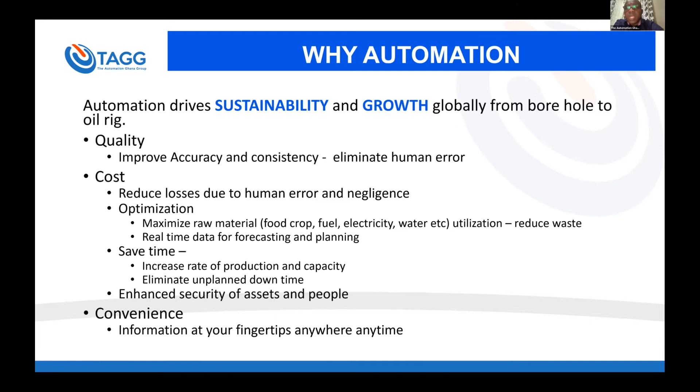An automation engineer should be able to help. Now you save time, increase productivity, and eliminate unplanned downtime. This is because these days, routine maintenance and scheduled maintenance is outdated. We do predictive maintenance, and predictive maintenance, obviously, you need some level of artificial intelligence. I'll talk a bit about it later on. And then enhance security. You can use automation to enhance your security of assets and people. These days, you can track anything, including human beings. And then convenience, of course.

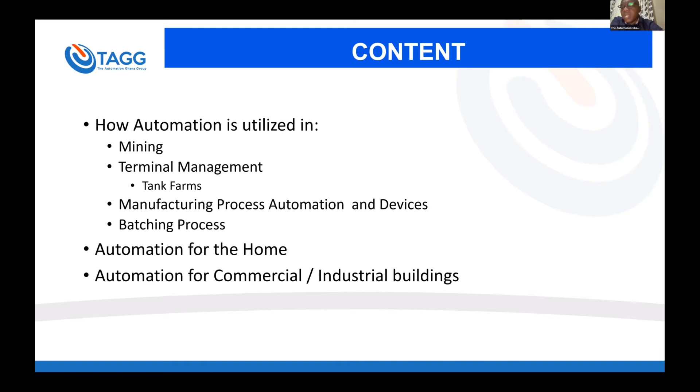So this evening, we'll be talking about how automation is utilized in the mine. I'll just take a bit of the mining process and talk about it. I'll talk about terminal management, particularly for fuel tank farms. I'll talk about the manufacturing process in general, and I'll zoom in into soap manufacturing, how automation is employed in the soap manufacturing process. Then I'll mention something on batching processes as well. Then we would go into smart homes and then commercial buildings, or buildings in general, how you can employ automation in such properties.

Now, this process could be driven by a conveyor belt and just motors, and it goes into the drum. But what if the drum fills up faster than it being emptied? There will be a backflow, and so you know that the ore would pile up on the conveyor. The conveyor would have to overcome the extra load, and then the motors would stall and stop and trip, and production stops. This is where automation comes in.

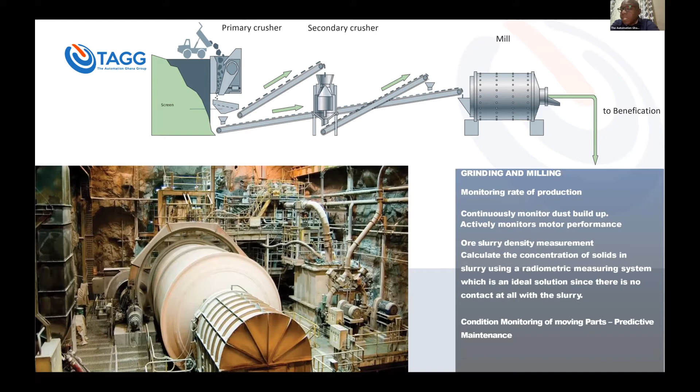As a minimum, there should be what we call the overflow prevention system, because as soon as you have fuel spillage, you have a disaster. So as a minimum, if you would not automate at all, there should be the overflow prevention system.

And how does this work? You install sensors on top of the tank, and they detect the presence of liquid and signal the pump that is filling it to stop, raise a siren, and send messages out there for everybody to be alert that this is what's happening.

Usually we have 3 levels: high level, high high level, and a dead level — this is the level you must never get to. For most installations, you find that the sensor at the very top never actually gets to see fuel, because the other 2 are more like a redundant system.

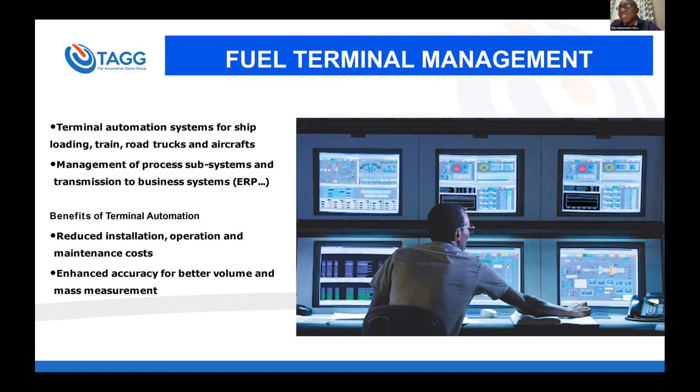And so these are primary sensors that go with automation. There is no way you can have effective automation in a typical fuel tank farm without these 4 sensors. And so our job as automation engineers requires us to understand the way these sensors work.

There is ship-to-tank transfer possibilities, tank-to-tank transfer. So within the tank farm, you can actually send fuel from one tank to the other. They also do additive injection.

Oil marketing companies sell fuel in different grades. So for example, Shell has V-Power and they have the premium. And this additive injection is a calculated batching system that they use to inject the additive, because over-injection will send the octane level of fuel to unacceptable levels. And under-injection obviously will cheat the customer. So these systems are designed to ensure precision, and so on and so forth.

In a typical tank farm, there will be several reports, and I'll go through the notes. So we monitor fuel levels. Tank level gauges report on the amount or quantity of fuel they have per unit time, so at any point in time, you would know how much you have.

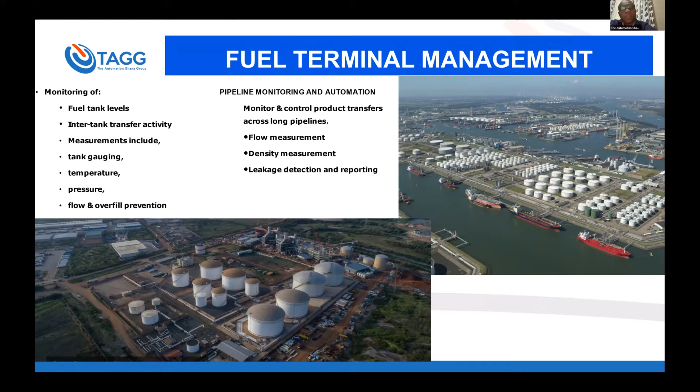The next thing I'll talk about is the batching process. So typically, if you want to prepare gari soakings, you would take water, take milk, and add some sugar and add some gari, and then you stir.

So the operator can push the start button, and if the program has been written properly, a pump will start. So liquid A, maybe the recipe is throw in 10 liters. Liquid B, recipe says 20 liters. So those ratios would have to go in.

But how does it go in? Valve 1, valve X0 would have to open. And then valve X1 would have to open. But as they open, how do you know the quantity? You need a flow meter on each of the lines to measure the 10 liters and the 20 liters respectively. And when they execute the 10 and the 20 respectively, a command has to shut the valves.

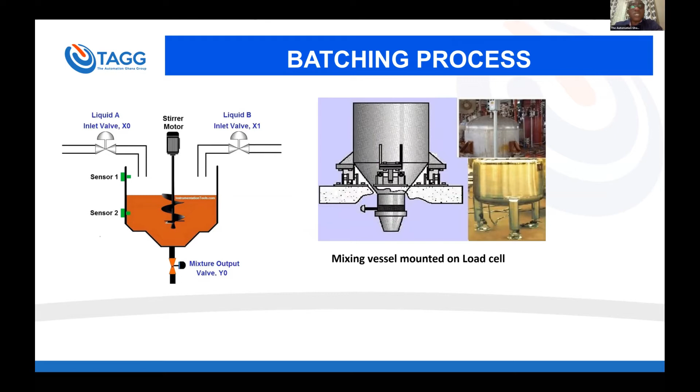So if the tank is half full, for example, 5 sensors will be used. The 5 bottom sensors will be used to determine the temperature of the liquid. In the past, the temperature sensors would be inserted at the side of the tank, and you have only one point. So you find that the top of the tank or the top part of the fluid would have a different temperature from the bottom part, and accuracy issues come in.

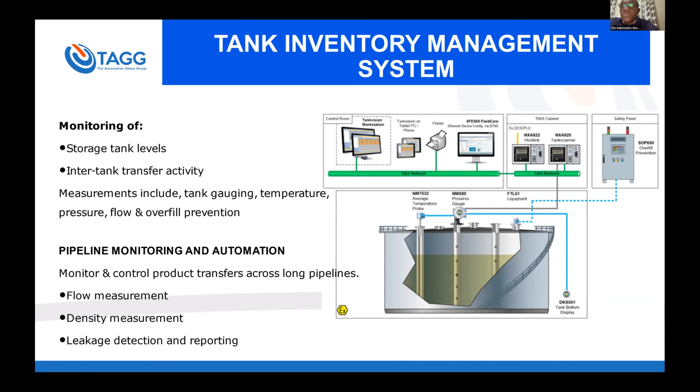So in Europe, fuel depots like these report in mass. In the past, it was reported in volume, and temperature issues always caused losses. People could change figures and attribute it to temperature changes. But since mass is not affected by temperature effects, now internationally, every fuel depot is reporting in mass. In Ghana, the law has been passed and implementation has started, so very soon that will also be effective here in Ghana. That requires every fuel depot to install temperature sensors and do some computations using the density of the product. These days, there are instruments that can even measure density directly, which makes it easier to determine the mass of the liquid, so there will be no issues with truck drivers trying to falsify weigh bills.

All right, so in a typical industry, you would find that you need to heat a process, or mix something, or fill something, or measure, produce, count, clean, check, pack, dry, store, or weigh something. Now all of these require some primary inputs, and this is where we come in.

So if, for example, you need to heat milk, there are several forms of heating. You can heat with steam, or heat with electricity, or heat with hot water. Now, how you control these uses the same principle: you create a PID loop. So you measure, and then you heat, and you measure, and you control. You heat, you measure, you control. You heat.

How fast you are able to cycle through this determines how accurate your heating would be. Mixing, same thing. As you mix, you check in. If you mix in two fluids, it's possible to check the turbidity using a turbidity sensor to see how homogeneous your mix is. For filling, we have level sensors and volume determining devices. You would measure flow, pressure, temperature, and level. We also have sensors to do counting and drying, checking temperature and humidity.

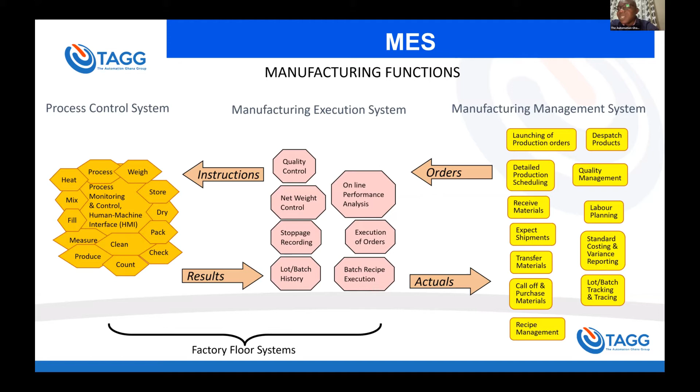There is no way you can choose not to automate to achieve such numbers, and you cannot compete in today's world with somebody who has an automated soap manufacturing plant that can churn out 24,000 tablets in one hour. So Ghana as a country requires to switch to automation to stay competitive, otherwise the gap will continue to widen.

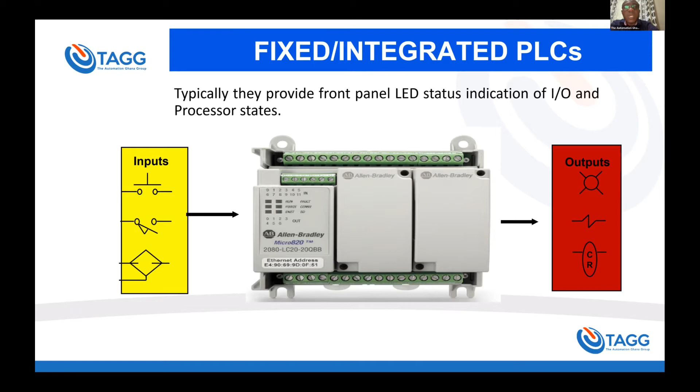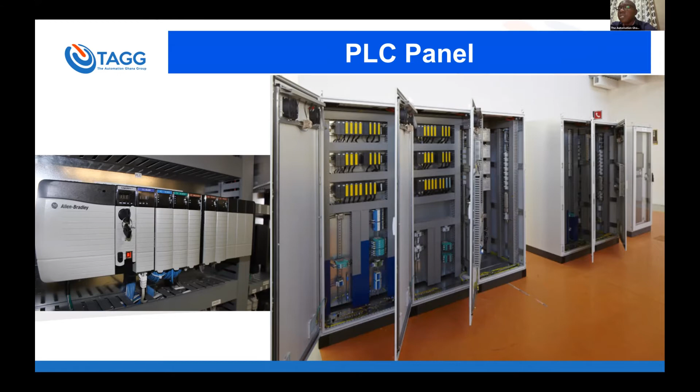So typically in a factory, this is what you would see in control rooms. This is where all the logic happens, and then you have your cables going to the field devices.

And PLCs use standard language. IEC 61131 is what we use, and there are 5 different languages. So it's international. If I meet a Chinese PLC and I'm able to connect to it, this is what you see, you won't see Chinese language. So it makes it easy for you to work everywhere.

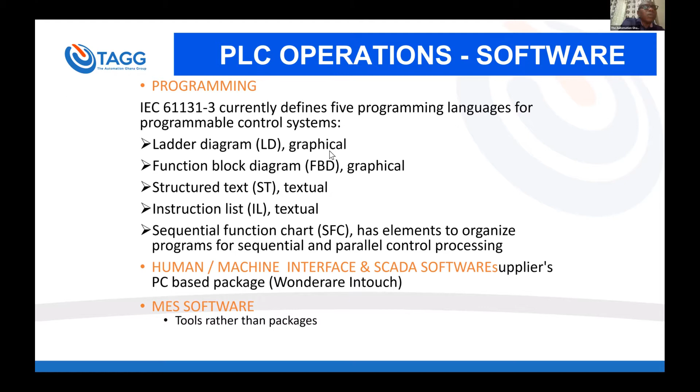For example, the proximity sensor can only detect metals. So if you have a milk tin and you want to count it, this is the sensor you would use. If you have a plastic bottle of water like Voltic and you want to count it, you probably require a diffuse sensor that may look similar but will be able to detect other things.

There are other sensors using different principles. Interestingly, all these principles we studied at DSTS, but there was no link at the time. But from where I sit today, I realize that a lot of these things were in the physics books that we used.

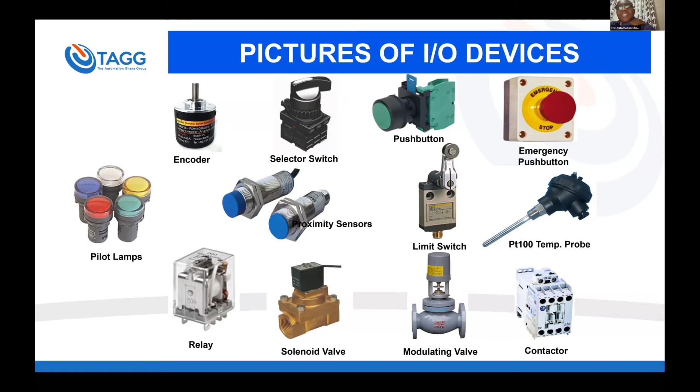So in industry, about 80% of prime movers are motors. Motors consume from 40 to about 70% of the energy used in a typical industry. If you want to move products from one point to the other, it's a motor. If you even want to use a pneumatic conveyor, it's a motor that will drive the compressor to charge the air. So motors are so important in industry, and you've got to know them inside out if you want to use them to drive stuff.

For example, if you are driving a viscous fluid, the motor you choose, or the sizing of the motor you choose, will not be the same as possibly using the motor to drive air or compressors or water.

But the amount of energy you need to kickstart a motor is quite high, and so technology has brought about other means. In the past, we were using standard switches, so direct online starters or star delta starters were used, which consume quite a bit of energy. A starter is not able to regulate the inrush currents that motors consume.

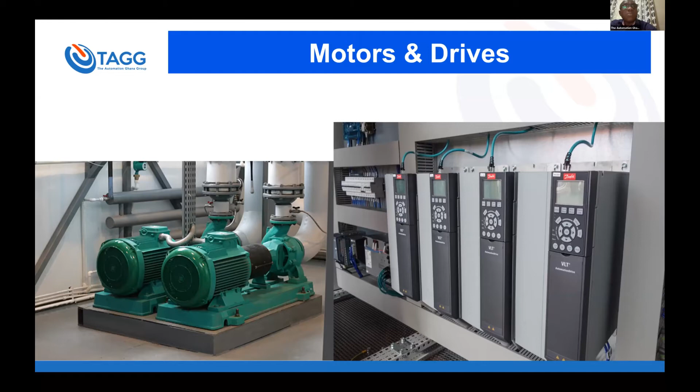A typical motor control center would have variable speed drives and direct online starters, circuit breakers and contactors and all of that. But for an automated industry, you would have some feedback from the way they are behaving that assists people, maintenance managers and engineers in times of troubleshooting. So typically this is what you would see.

This is not the same as the PLC panel I showed earlier. The PLC panel does the logic - that's where the brain is, that's where the control is. The motor control center is the one that drives all the motors. So that is where the big power sits.

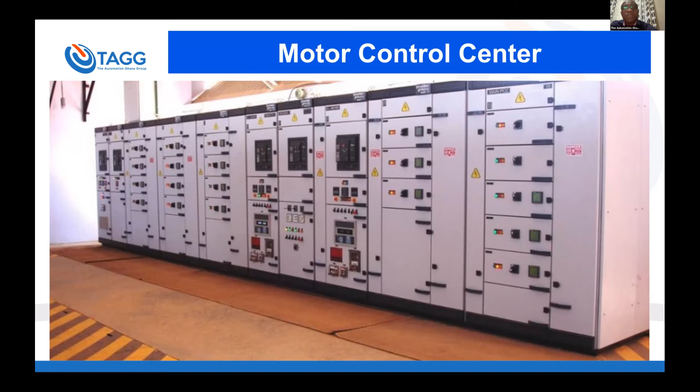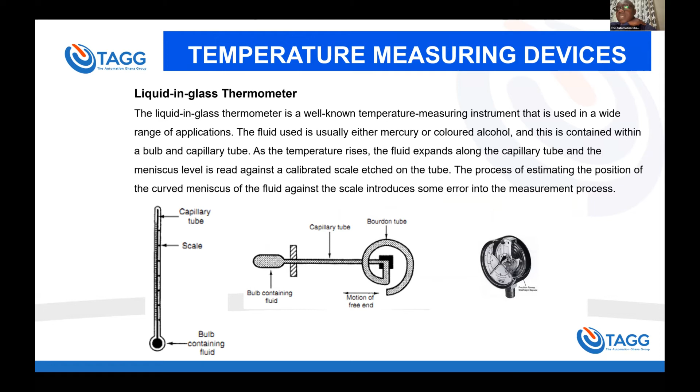It's a very common process, and I'll show you when we get to the soap making side. These are typically sensors that used to be around, but they are all obsolete now. In the past, we were using bimetallic strip temperature sensors, etc. Today, we are using PT100s, that is platinum sensors, and they look like what you have in the middle.

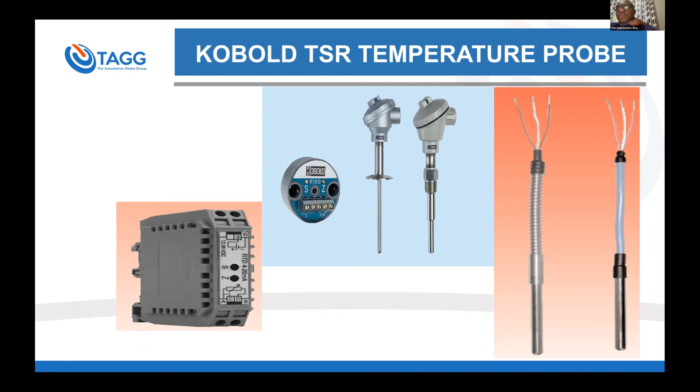And this uses the good old equation for speed of light to compute the length. So that's basically what it is.

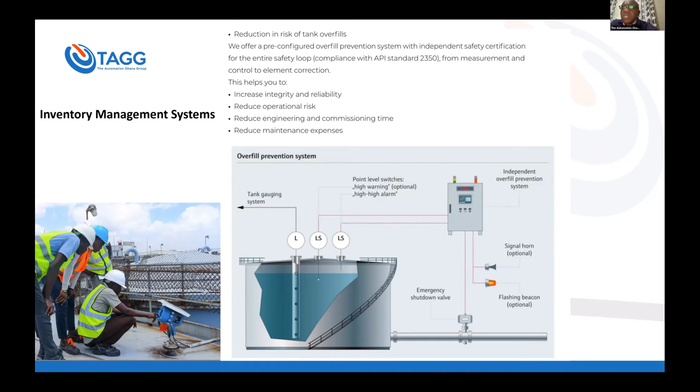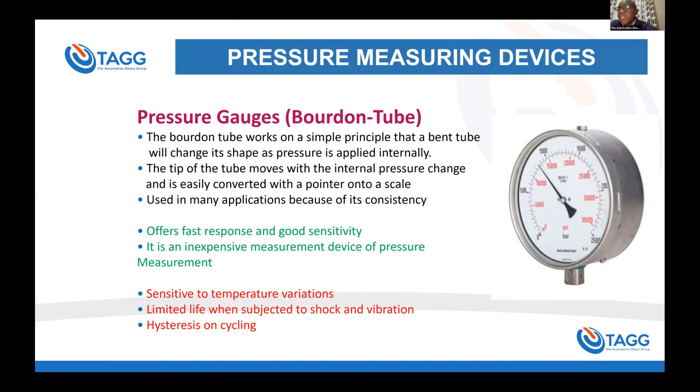Pressure gauges are still used, but they are only for indication. This other type is what we use for automation. These are the same pressure sensors, but they are able to talk to computers, with communication cables going to them, sending real-time information for us to compute and take decisions.

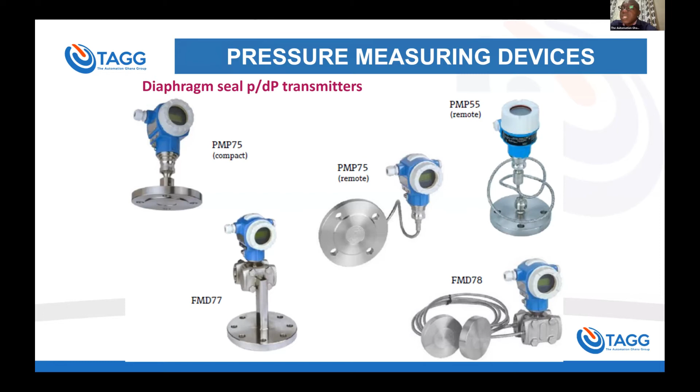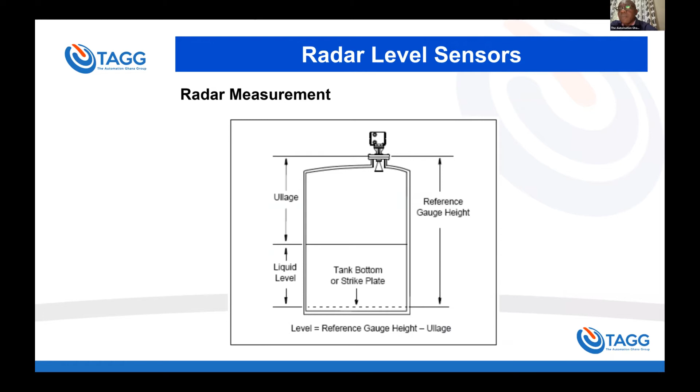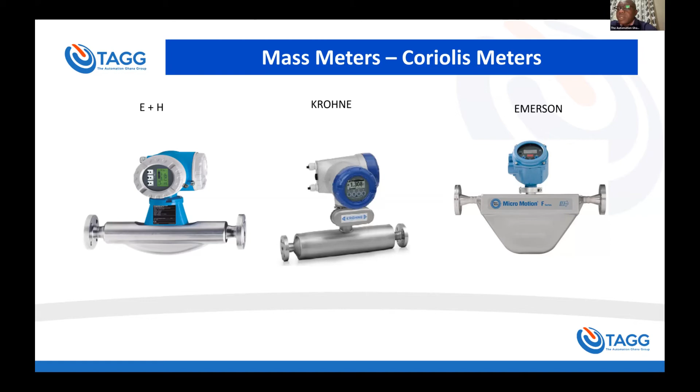This is what is recommended for what we call custody transfer. Custody transfer is when you are transferring liquid for exchange with money—you must do custody transfer, and it is certified and acceptable to trade using this type of meter. Any other meter not certified for custody transfer could have errors, and you either cheat the buyer or cheat the seller. So this is the type of meter recommended today worldwide.

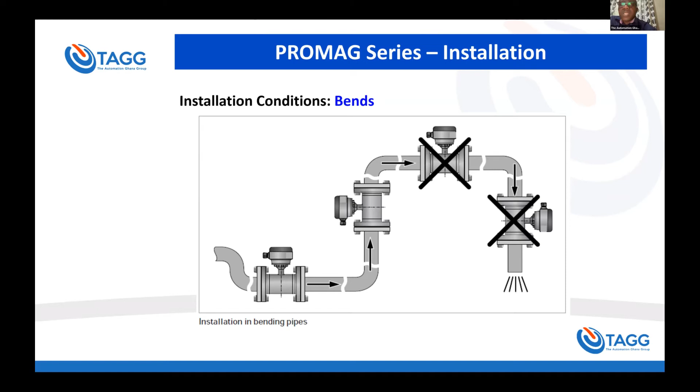How you install the meter is also crucial. I won't go into the details, but you cannot install a flow meter with the fluid pointing down—it has to climb up, because we always work with a fully filled pipe in order to measure accurately. If the pipe is not full, you may not get it right, and that is where you need to engage a professional to do your installation work.

I have a short video for baggage handling. This presentation is becoming quite long.

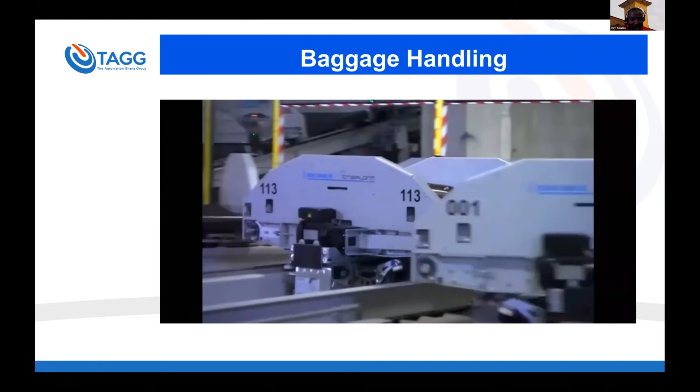Are you able to see? Yes, I am able to see. This is exactly what my company does, what we do. Oh, okay, baggage handling, yes.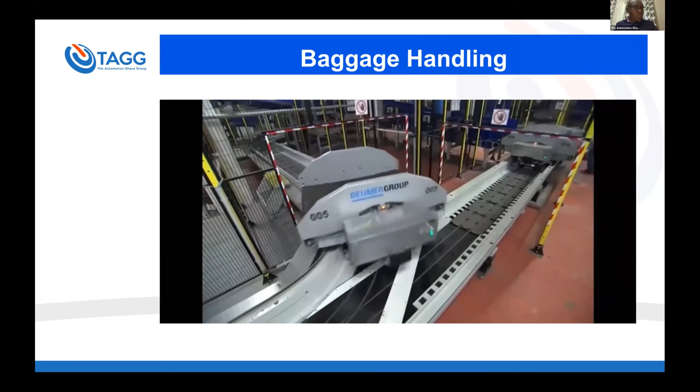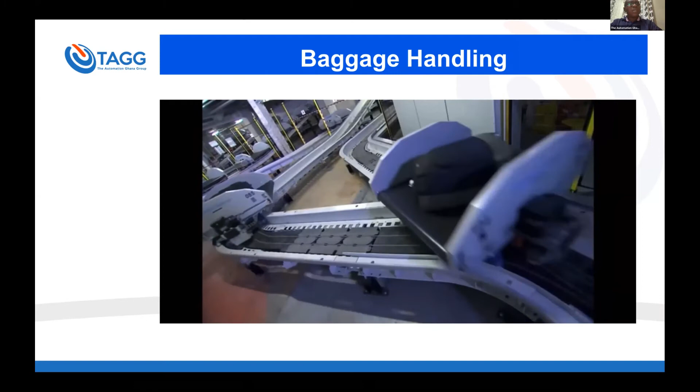So basically, a typical automated baggage handling system checks several things, but it starts when the traveler drops his bag. A barcode is stuck on the bag, and that barcode has so much information; it is scanned along the conveyor belts throughout until it gets on board the aircraft.

A highly automated baggage handling system would have diverters—horizontal diverters that take you through different gates, or tilting diverters that take you to other floors. For example, if you are a transit traveler, pre-arrival information is keyed into the system automatically, and your bag goes to your next connecting gate.

All this is software-based, and once it executes, the outputs that need to get onto the field to control motors, diverters and actuators all go in there and get this done beautifully. At the end of the day, the passenger travels in style and has no idea what's going on within the electrical panels.

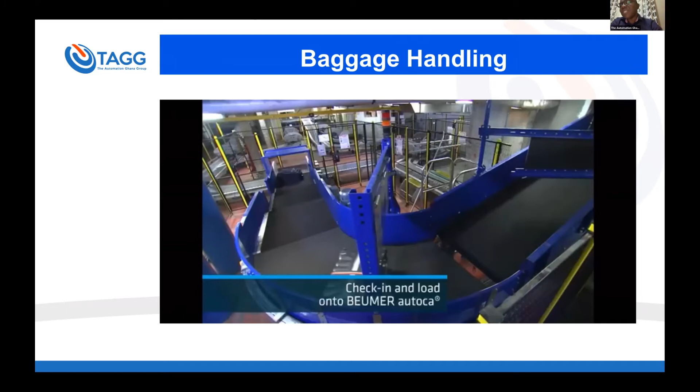So a lot of work goes into building such systems—just to give you an idea of the kind of work we do.

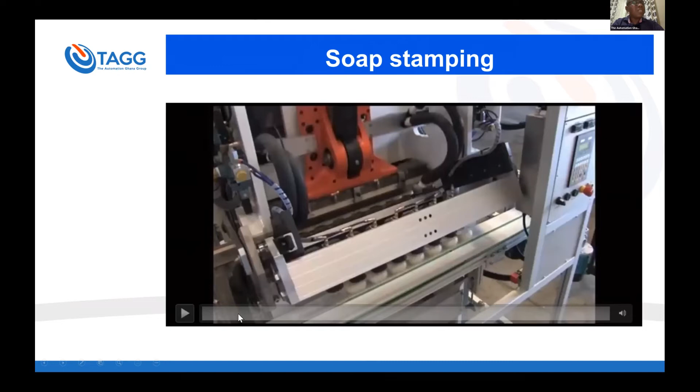And then another one—I'd want to show something interesting about soap making. So here you have... I'll just stop it.

You see that there are gaps somewhere, and in other places the soap tablets are touching each other. The gaps you have on your right must be there to synchronize with the wrapper. At that point, the tablets are getting into the wrapper, and sensors on the line determine where they should be, with stoppers that stop it to make sure it is synchronized with the wrapper.

Otherwise, the label on the wrapper—for example, if it's Lux soap—will not be centered on the soap, and when you buy it you won't be able to read what the label is. That happens using sensors that are able to position the tablets on the conveyor.

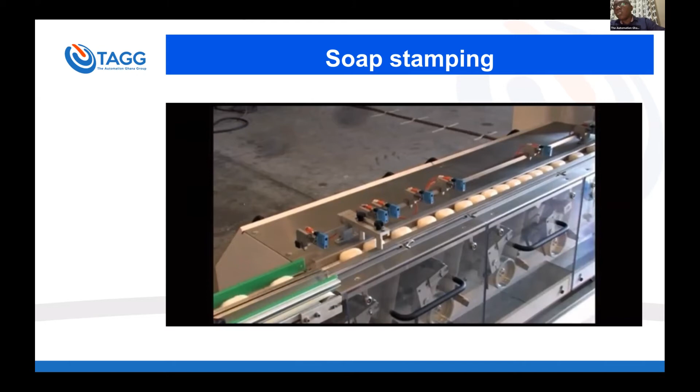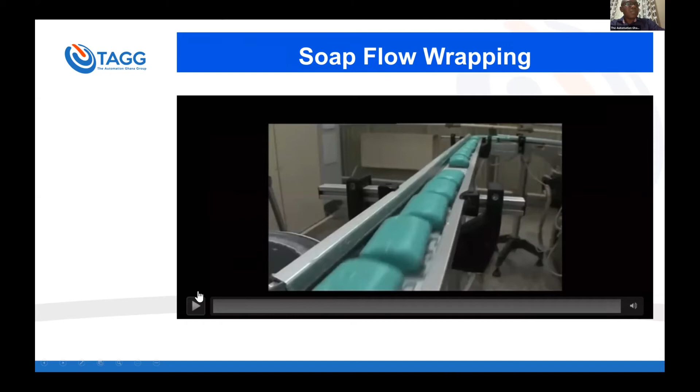And then the gaps on the other side, let's just... okay, let me play this one. It's in this other video, so we'll go through this one.

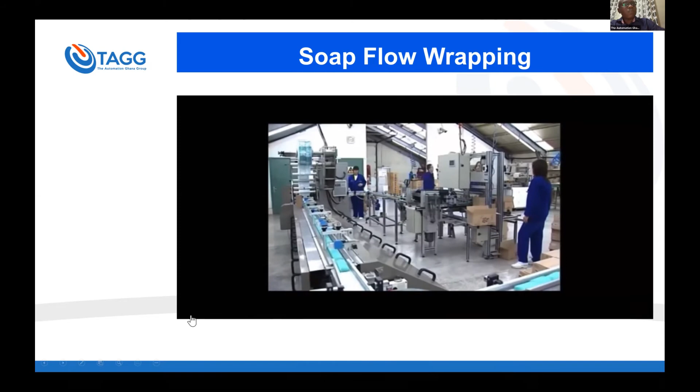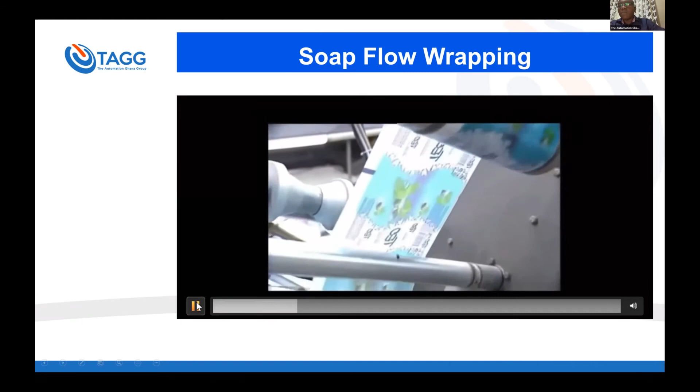So the black line on the wrapper is the eye mark. The sensor looks out for that eye mark, and the gap between that one and the next one is what determines where the soap should meet the wrapper. So when we are synchronizing, we need to make sure we count the pulses between those two marks to set how the soap enters the wrapper.

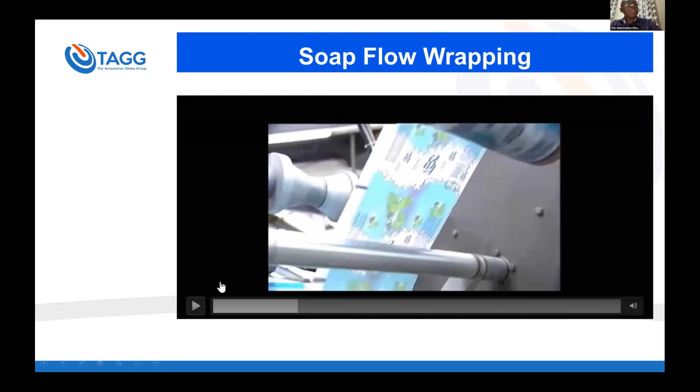This is a flow wrapper. What it means is that the wrapper will be rolled into a cylinder for the soap to enter. And then a rotary knife would come in to cut the wrapper and split it. So basically that's how it works.

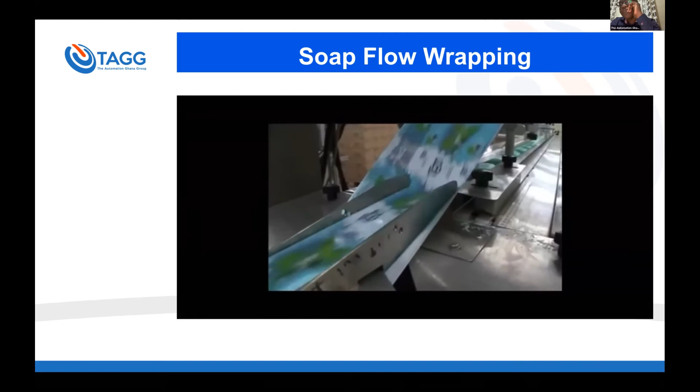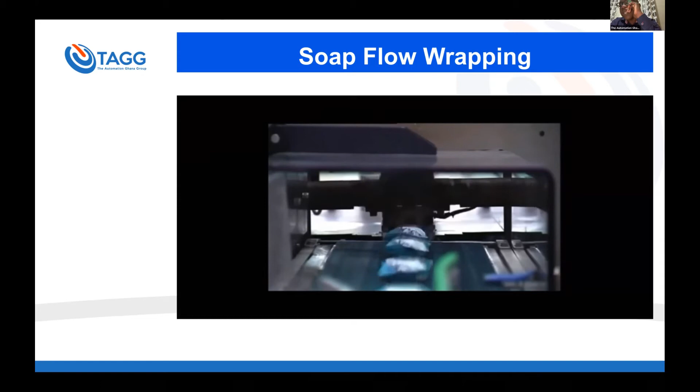But on this line, there are so many sensors. There are proximity sensors, color diffuse sensors, retroreflective sensors, encoders, temperature sensors. That's the rotary cutter. The rotary cutter is also synchronized with the wrapper.

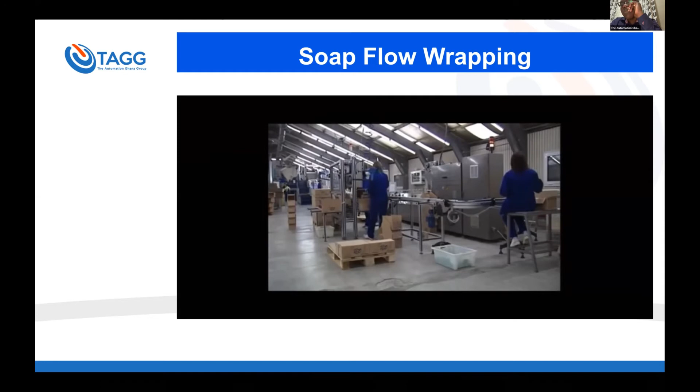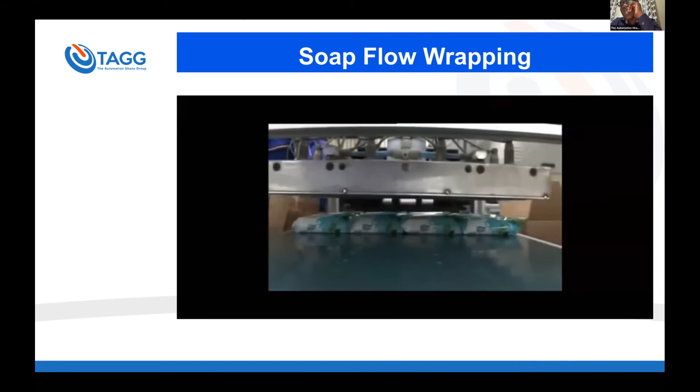So basically, that's how we do it. And then there's one last thing about the packaging. So packing, that robotic arm you see there has vacuum nozzles. It drops on it, engages the vacuum, sucks the tablet, lifts it, and drops it. Each one is timed accurately such that it picks all of that at the same time. If one nozzle fails, the box will not be filled properly, and that is also monitored.

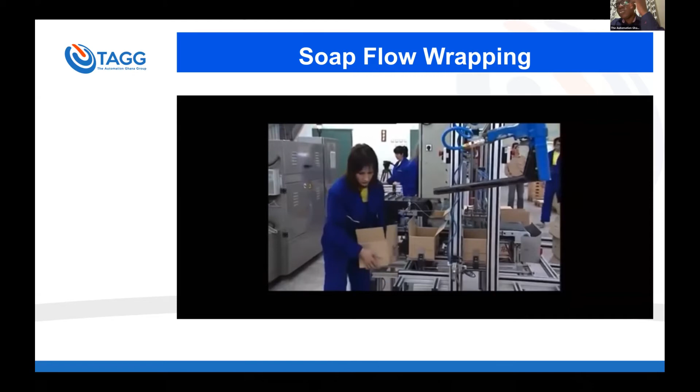Let's move to Smart Home. Enough of industry.

Okay, so Smart Home is now redefining the way we live. Driven by IoT, the changes are very fast, development is very fast, and every day there's a new product. So a Smart Home is a home in which devices can talk to each other. Your lights can talk to your TV, your curtain can talk to your phone, etc.

You can control things locally or remotely. It doesn't matter where you are, as long as you have the internet, you can talk to devices. And these days, you can also talk to them through some of these voice-activated gadgets that are all over the place.

So you can control gates, garage doors, ceiling fans, sound systems, sockets, cooker, just name it. Devices are becoming smarter and smarter. All this is based on the basic automation that industry players have been using since the Second World War. But obviously the internet has changed things, and it's making things move very fast.

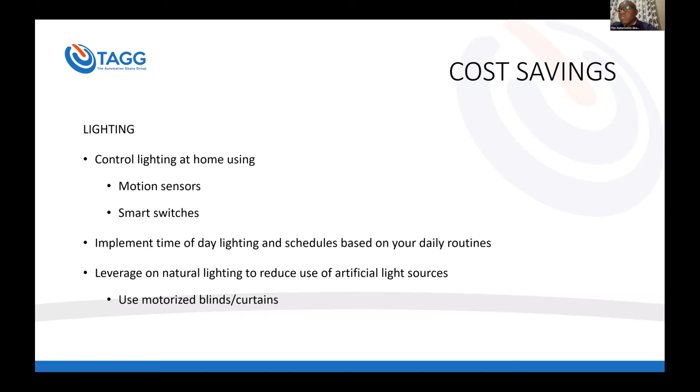You can also use motorized blinds to open and shut your windows and curtains. And then air conditioning - we use the same sensors that control your TV to control your air conditioner. So you don't need to buy any special air conditioner anymore. We just pick any type of air conditioner and we can automatically control it from your smart home.

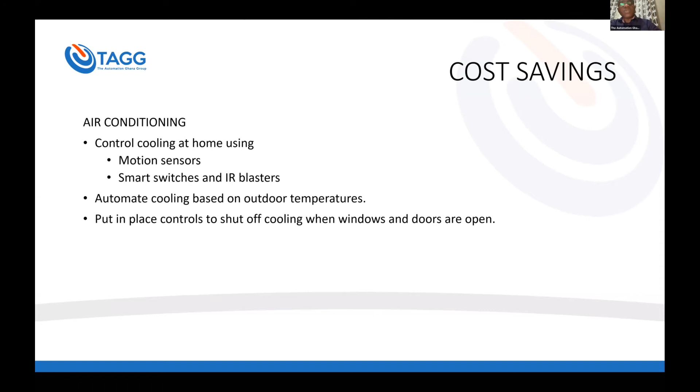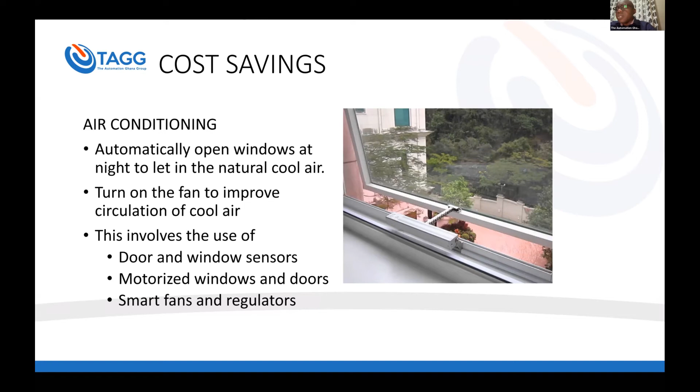And these are some of the devices you will find around. Most of them use standard protocols, so it makes it easy to integrate. A typical window with an actuator - if you want the window to open every hour to bring in fresh air, why not? All you need to do is configure it, and it does that for you.

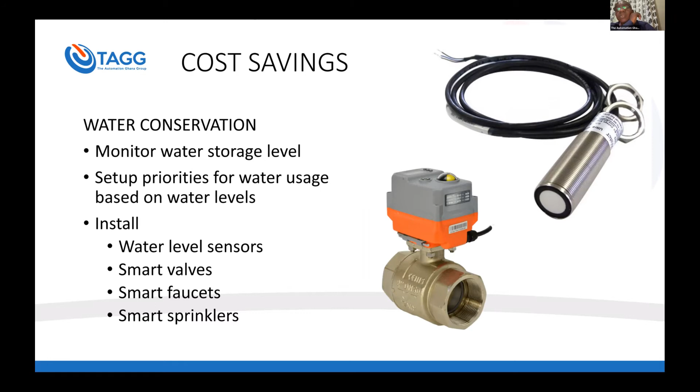Door sensors and window sensors, as I said. Water level sensor on the right, and an automatic water valve as well. So you can actually control things - when you are not home, Alexa, or the smart home system, shuts all your water lines. So there is no way you can even have your home flooding.

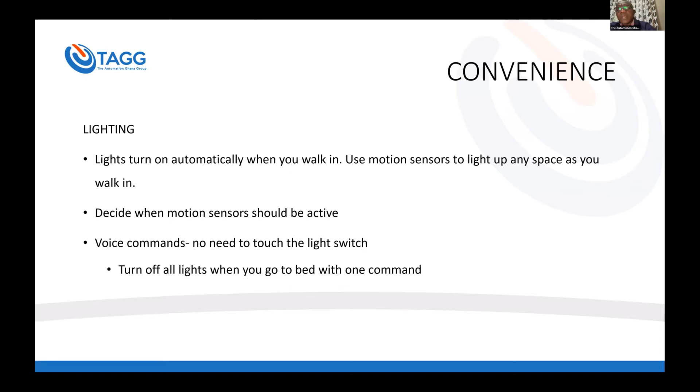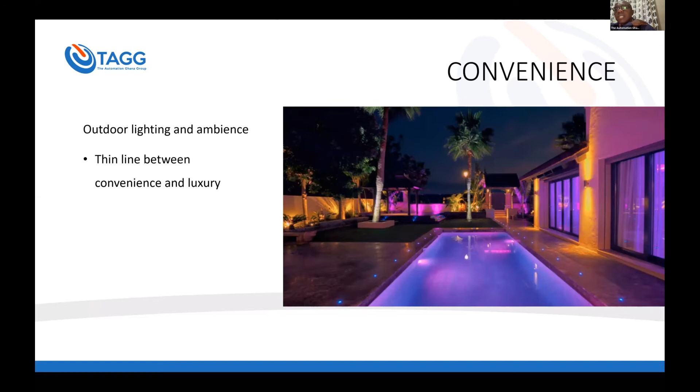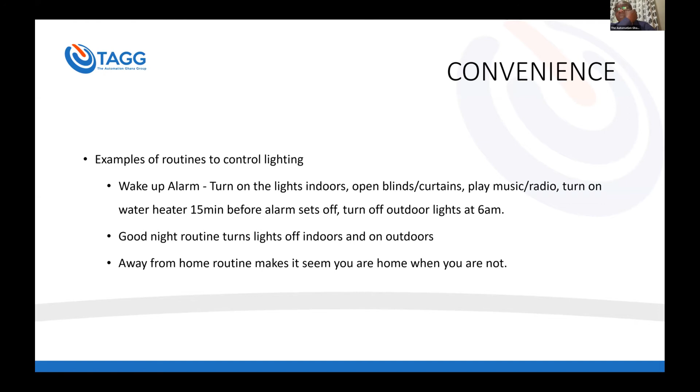Nice. That's wonderful. Yeah, and then you've got virtual assistants, as I said, Alexa. We need to change Alexa to Kweku, don't we?

All right, so some of the routines. Good morning, Alexa will take you through these steps, it will just do them automatically: open curtains and turn on lights, etc., everything that you've pre-configured. Good night, it will take you through: arm the intruder alarm, disable motion sensor in the bedroom, set the temperature to a convenient temperature for you. All of that.

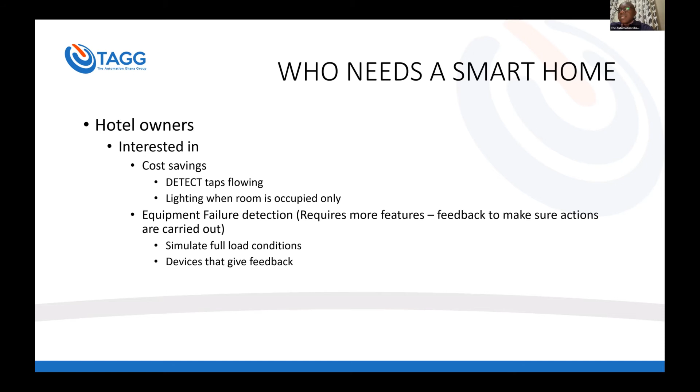So who needs a smart home? Landlords, obviously. Hotel owners, to be able to determine and optimize the costs that is used, whatever expenses that is going into the running of the hotel, etc. We are able to also determine devices that are faulty before they actually get reported.

Now for commercial, I think I've spent 1 hour already, right? Yeah. So I would just go through this quickly.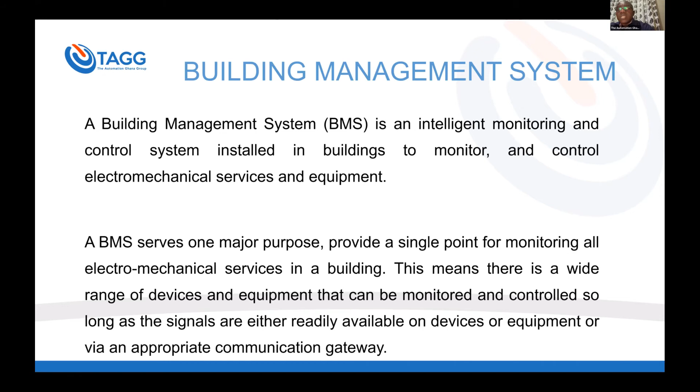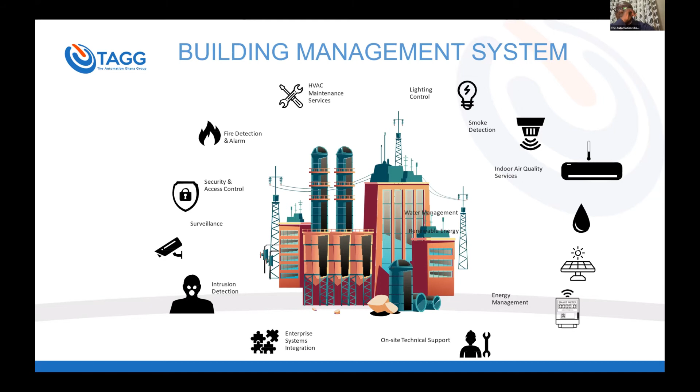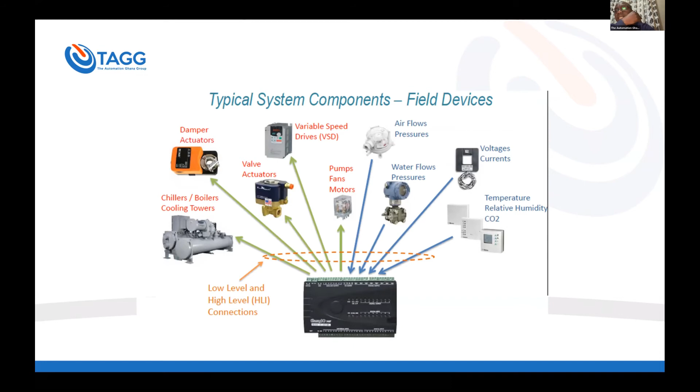Building management system is about determining the state of devices in the building. So we're monitoring air conditioning, fire system, security, surveillance, intrusion detection, water management, and all of that. It's similar to industry, it's just that this is applicable to buildings. You would have a typical application using the following devices: actuators, variable speed drive for lifts, water sensors, just as we have for homes, and a typical screen.

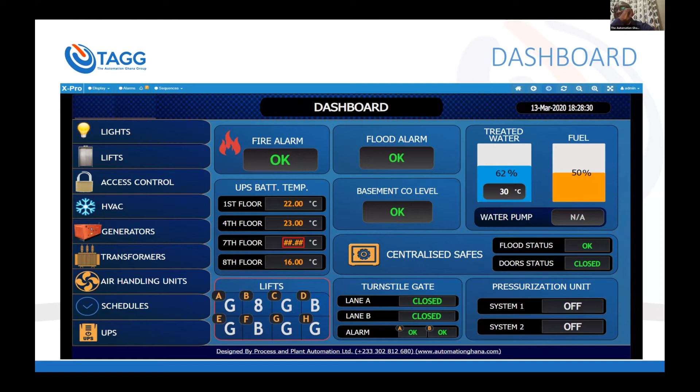This is one project that we did here in Ghana, and within the facility manager has this dashboard and is able to tell where the lifts are. In this building, there are 8 lifts, and it tells you where each of them is at any point in time. It gives you temperature at any point in time, water level, fuel level. On the right side, you can see there is no flood yet, etc. So this is a typical building management or building automation screen.

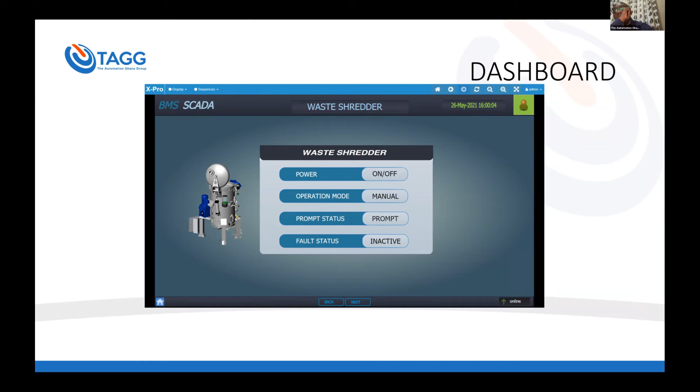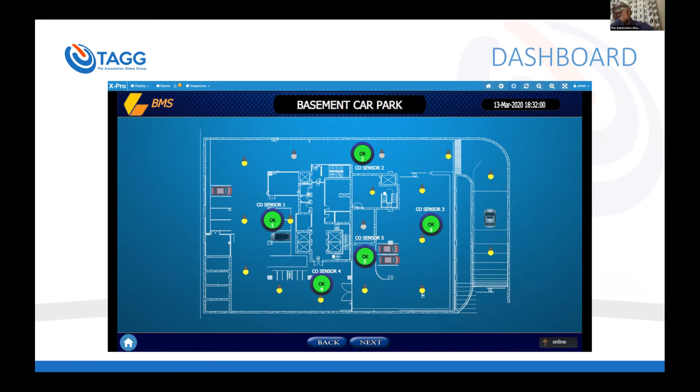We did another one for a hospital where they wanted to monitor the waste shredder, and that's the typical screen. And this is for a basement car park where we are monitoring presence, number of vehicles, and also carbon monoxide monitoring.

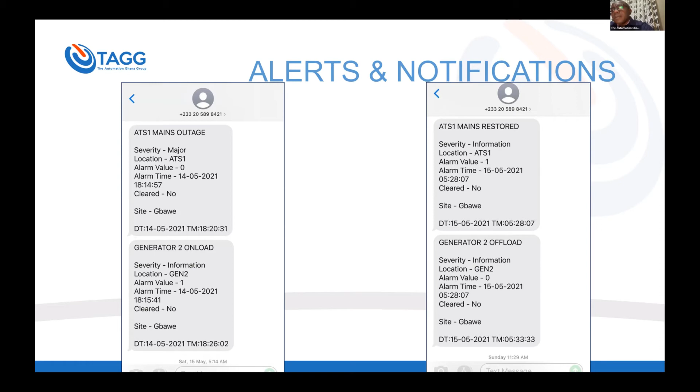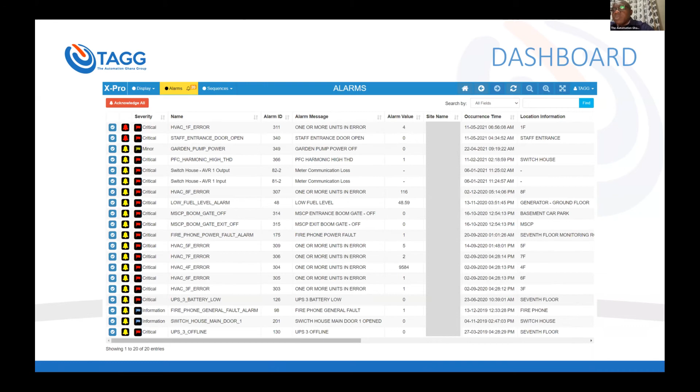A typical alarm screen tells you garden pump power, gives you the time and date, and what the issue is, so whoever is in charge of maintenance can react to it before things get out of hand.

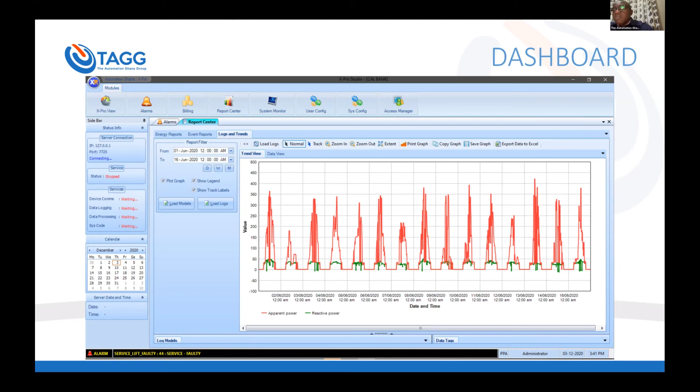Of course, there are challenges in Ghana as far as building management is concerned. The knowledge is still low. People don't believe that Ghanaians can do this and can maintain this. So we always have to talk and talk and talk.

That brings me to the end of the one hour and five minute presentation. Well done, I gave you 35 to 40 minutes, you know.

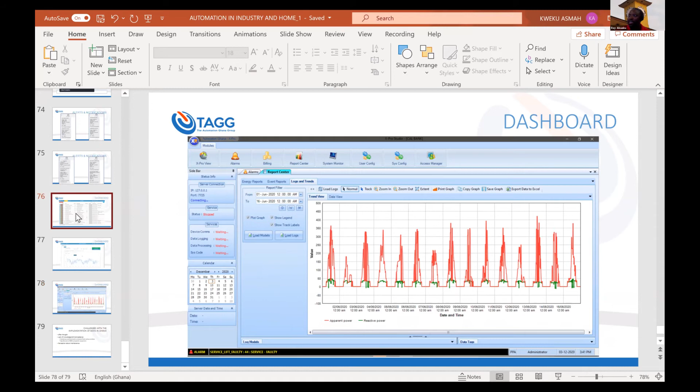Well done, I'm so glad. I'm so excited that you made time, particularly when I said, can you give us a talk, and you didn't even give me any excuse, right away you said yes. So I'm really glad. We'll go into questions, but before then, can I just say this?

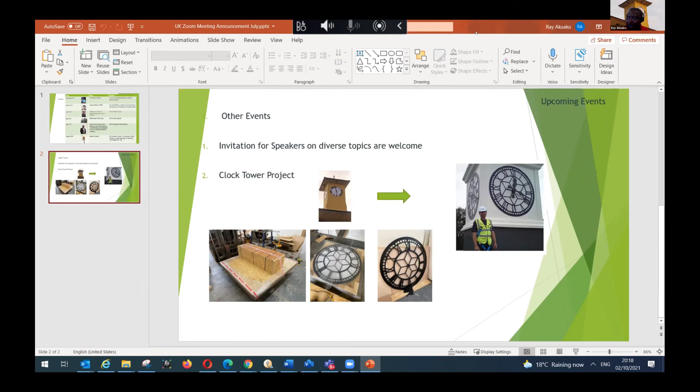All right, Cici, you can unmute. Hello, hello. Hello, good evening, good evening. Well done Kweku, he's really given us a good insight into automation. I want to ask him a question.

Kweku, if I have a two-way gang switch and I want to do automation — I've already done Alexa in my home, but I have a two-way gang switch that I want to use. Normally with a two-way switch, one should go off, but I want both to work. I don't want to buy two of the switches, how do I go about it? Do you understand my question? You're using those two switches to control one light? Yes, correct, I have a common switch in my sitting room, they come at both ends — one from the bedroom to switch it on, or coming into the house you switch it on. I get it, but I want it automated. You need two small devices that would connect, and they will hide behind the switches to get it done.